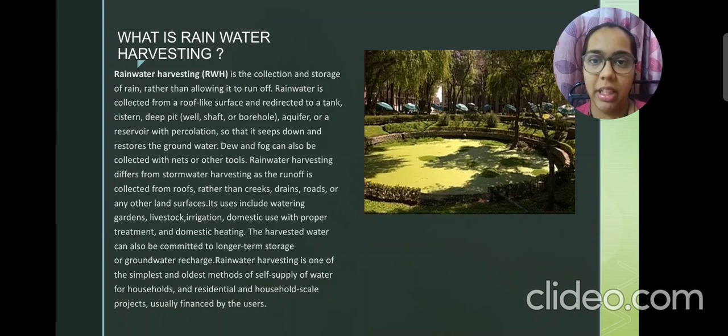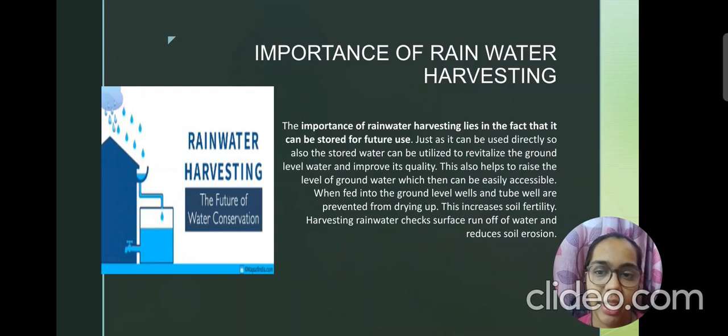Importance of rainwater harvesting. The importance of rainwater harvesting lies in the fact that water can be stored for future use. Just as it can be used directly, so also the stored water can be utilized to revitalize the ground level water and improve its quality.

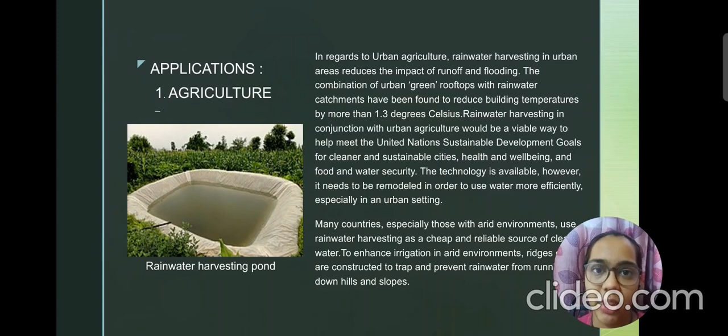Applications of rainwater harvesting are: first, in agriculture. In regards to urban agriculture, rainwater harvesting in urban areas reduces the impact of runoff and flooding. The combination of urban green rooftops with rainwater catchments have been found to reduce building temperatures by more than 1.3 degrees Celsius. Rainwater harvesting can also be proven useful in storing water for agricultural purpose.

Second, domestic use. About 40% of Thailand's rural population utilizes rainwater harvesting. Rainwater harvesting was promoted heavily by the government in the 1950s. In the 1990s, after government funding for the collection tanks ran out, the private sector stepped in and provided several million tanks to private households, many of which continue to be used today. Rainwater harvesting is mandatory for homes built in Santa Fe, New Mexico.

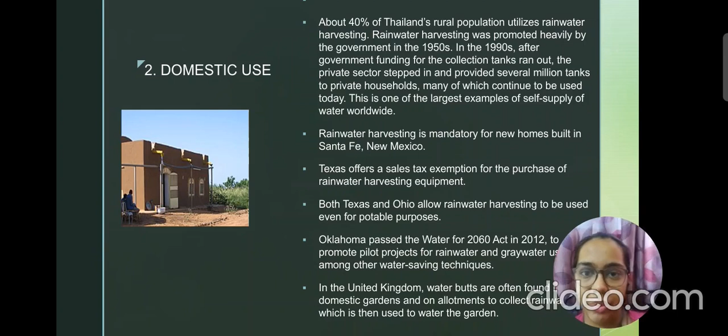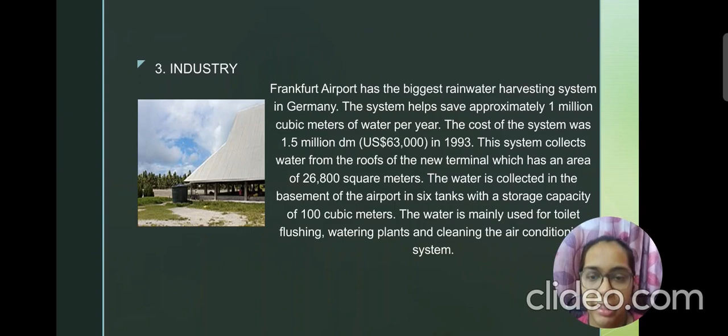Third application is in industry. Frankfurt Airport has the biggest rainwater harvesting system in Germany. The system helps save approximately 1 million cubic meters of water per year. The cost of the system was $63,000 US in 1993. The storage capacity of these tanks was 100 cubic meters.

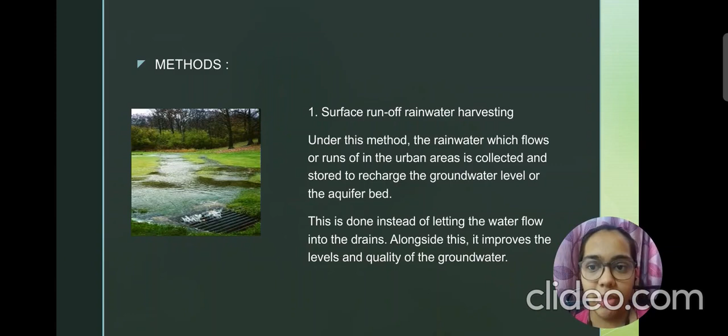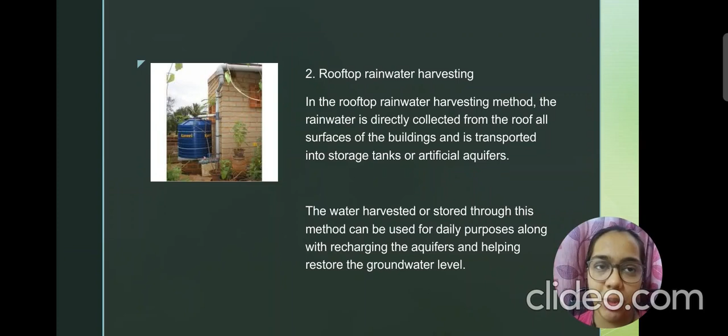Methods of rainwater harvesting are: first, surface runoff water harvesting. Under this method, the rainwater which flows or runs off in the urban areas is collected and stored to recharge the groundwater level or the aquifer bed. This is done instead of letting the water flow into the drains. Second, rooftop rainwater harvesting. In rooftop rainwater harvesting, the rainwater is directly collected from the roof and all the surface of the buildings and transported into storage tanks or artificial aquifer.

There are various advantages of rainwater harvesting. Firstly, rainwater harvesting to recharge the groundwater level is better for the environment and the planet. It helps you in lowering your utility bills by collecting and harvesting rainwater and storing it in the tanks, reducing dependency on municipal water supply. It will ensure the availability of water whenever you need it, regardless of any adverse situations like supply cut-off or shortage of water.

Rainwater has been the source of growth for the environment and ecosystem for millions of years. Therefore, it is better for gardening, as it is relatively pure and free from toxins. It can also prevent erosion of soil.

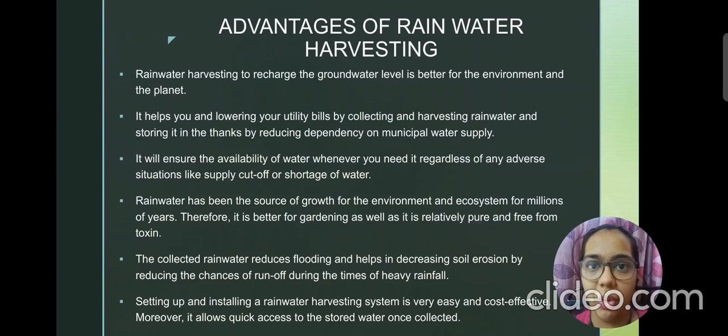Rainwater harvesting in India. Tamil Nadu was the first state to make rainwater harvesting compulsory for every building to avoid groundwater depletion. The project was launched in 2001 and has been implemented in all rural areas of Tamil Nadu. Chennai had a 50% rise in water level in 5 years, and the water quality has significantly improved.